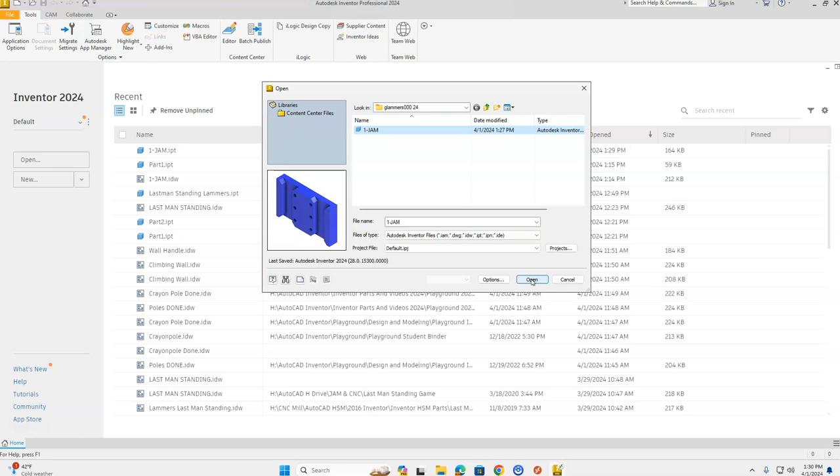Starting with Inventor open, we're going to come up to the orange file in the top left hand corner of the screen, and select Open from the menu. When our Open screen comes up, make sure we're in our H drive, first initial last name 000, and you should see your one jam part there.

Click it to select it, and then select Open. Now, to create our tool paths, we're going to go up above our ribbon bar, where there are different tabs: 3D Model, Sketch, Tools. We want to find the CAM tab right here.

Once we have the CAM tab selected, the first thing we need to do is go to the Job section in our ribbon bar and select Setup. Once this opens up, in our model browser bar on the left hand side, you can see we have three tabs at the top. We're going to take a look at each one, and in each tab we'll go top to bottom.

In this first tab for our setup, we're going to come down to the origin section in our work coordinate system and change stock box point to model origin. You're going to see it take our origin that's in the center here and put it in the bottom left hand corner. So model origin we want selected.

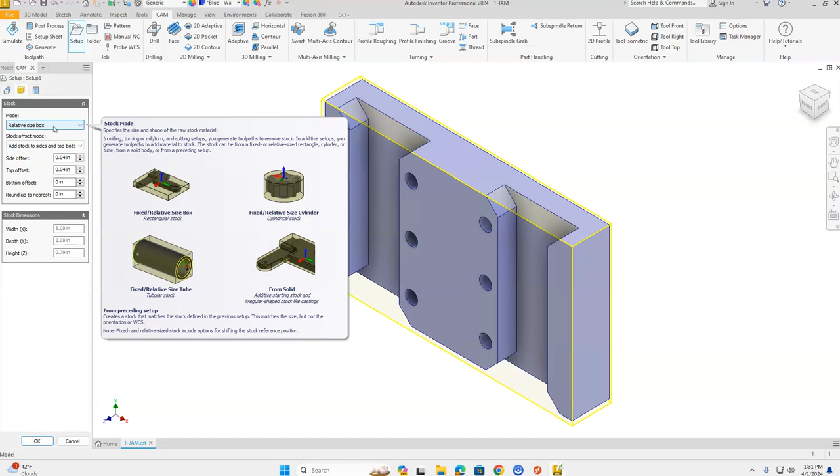Let's go on to our second tab, which is our stock setup. Here we're going to keep it at relative size box, but we're going to change the stock offset mode to no additional stock. You'll see there's a little gap between the edge and our yellow highlighted part, but when we choose no additional stock, it snaps right to the edge of our part.

Let's go on to our third tab, the Post Process tab. We're going to highlight the 1001 that's defaulted in there and change that to one jam. Then click OK.

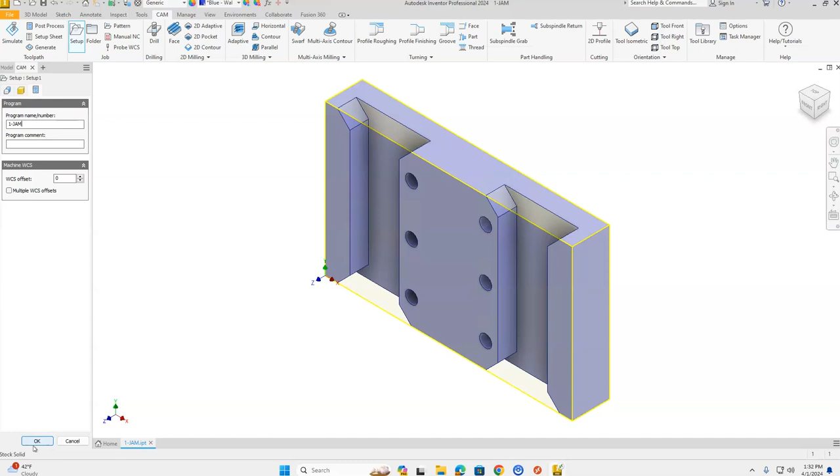Now let's take a look at drilling these holes first. In our ribbon bar, we're going to go to the drill section of our part.

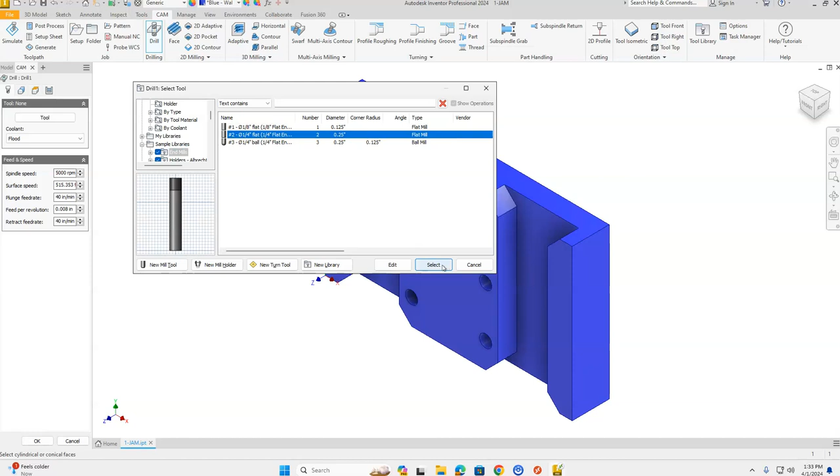In our model browser, again on the left hand side, we have four tabs across the top. We'll go through each one top to bottom. First, in the first tab, we select our tool. Click on the tool button and go to the window on the left hand side, scroll down a bit, and under sample libraries you should find end mills. We're going to choose tool number 2, 1/4 inch flat end mill, and click select. You can see our end mill come in right at our origin.

Let's go to our next tab, where we're going to create and select the holes. I'm going to come over here and select each one of my holes, clicking them in a sequenced order. However, if you take a look here, we also have optimize order as a selection, which means the computer will determine what is the best path to take.

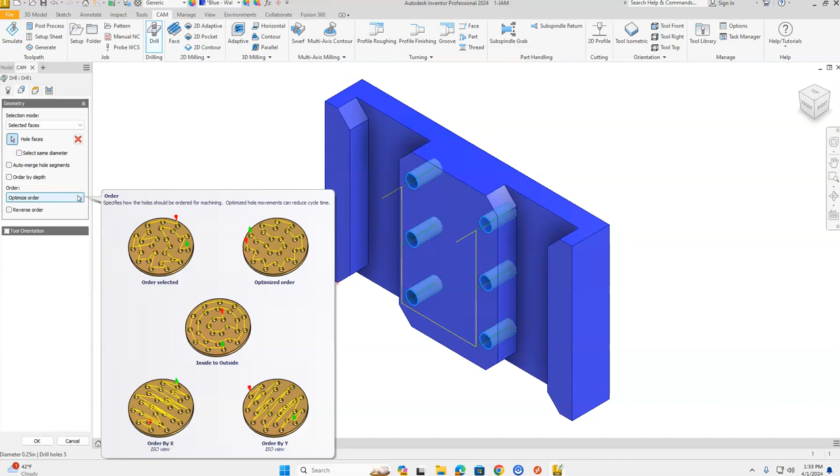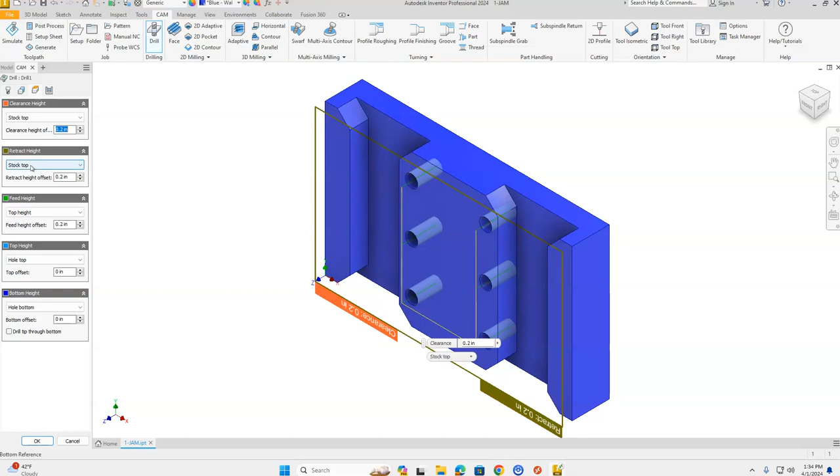Let's go on to our third tab, where we'll establish our heights. Here in our heights tab, the first three items—clearance height, retract height, and feed height—we're going to change each of these to stock top and 0.2. Let's double check: clearance height, stock top 0.2; retract height, stock top 0.2; feed height, stock top 0.2.

Let's go on to our fourth tab. In our cycle section for this tab, we're going to have drilling, and it's going to rapid out, which is exactly what we want. It will drill the hole to the bottom, rapid retract out, then rapid over to the next hole and drill that one, continuing until it has them all. Let's go down to our model browser bar and click OK.

So now we have our stock set up and the holes programmed. Now we're going to do the two pockets here on each side. We're in the 2D section in our ribbon bar, and we're going to come up and choose 2D pocket.

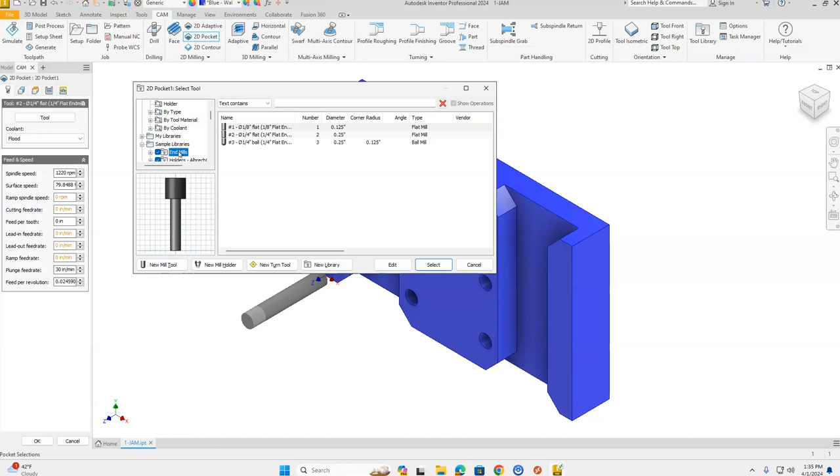For our 2D pocket, we have our tabs at the top. We're going to work from left to right, and each tab we're going to take a look at from top to bottom. The first one, we're going to select our tool. Click on your tool button, go into this little window, scroll down until we find end mills, and select tool number 2, a 1/4 inch flat end mill, and click select.

Next, let's move on to our geometry tab where we select our geometry. Here we want to click the bottom of the pocket for each one of these sections.

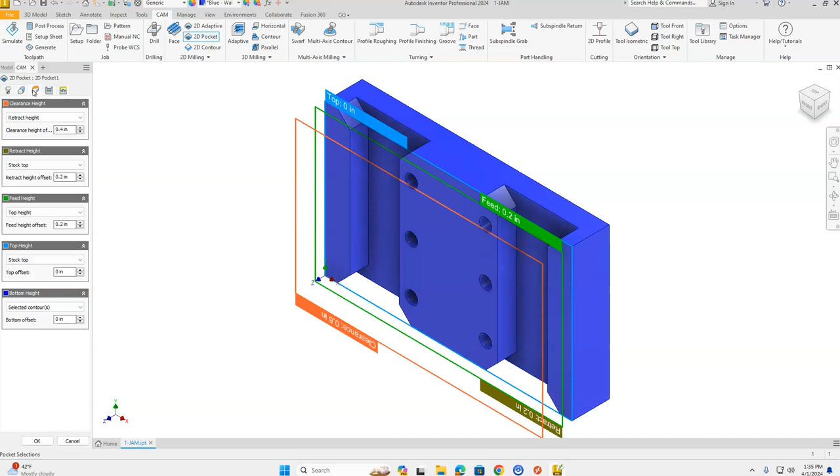Once we have that done, let's go establish our heights in our heights tab. Click on your third tab over. Once again, these are going to be stock top and 0.2, stock top 0.2, and stock top 0.2. The top 3 we're changing - clearance height, retract height, and feed height - are all stock top and 0.2.

Let's go on to our multiple passes. In here, we are going to choose multiple depths. Make sure that section is green check marked. Then we're going to change the maximum roughing step down distance here to 0.25. The next thing we want to do in this section is where it says stock to leave - we're going to uncheck that box. Now we're finished with this tab.

Let's go to our final tab on the right hand side. Here we're going to change our safe distance. You see it highlighted red. We're going to highlight that and change it to 0.2. Next, in our leads and transitions, we're going to uncheck lead in and uncheck lead out. For our ramp style in the ramp section, we're going to change it from helix to plunge.

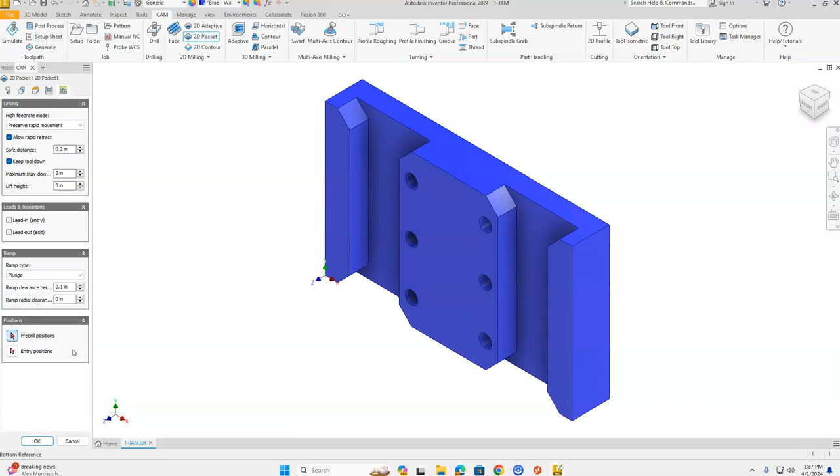Once you have those finished, down in our model browser bar on the left hand side, we're going to click OK, and it should generate those tool paths right there. If you click on that, you can see the tool paths it's going to take. If you click on the drilling section, it's going to show you the drilling operation.

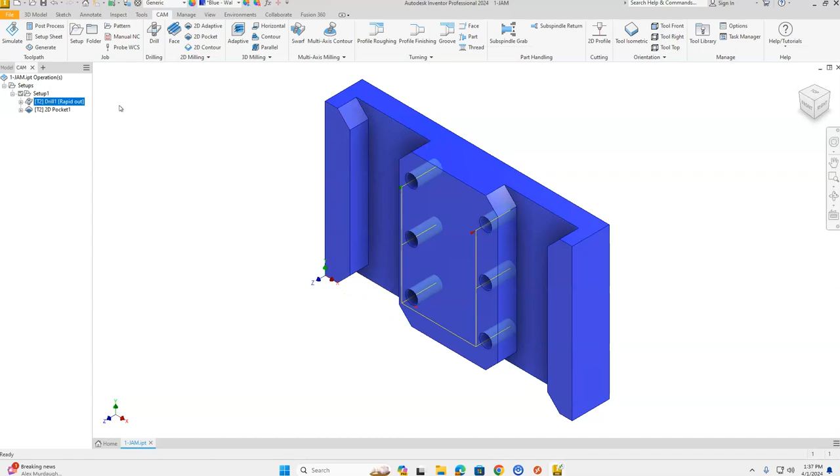Now I want you to click one time on Setup 1. That selects both of them. Then we're going to go up to the top where it says Simulate on the left hand side. We're going to turn our stock on right here, and then click the play button in the middle of the screen. It's going to create your drilling operation first.

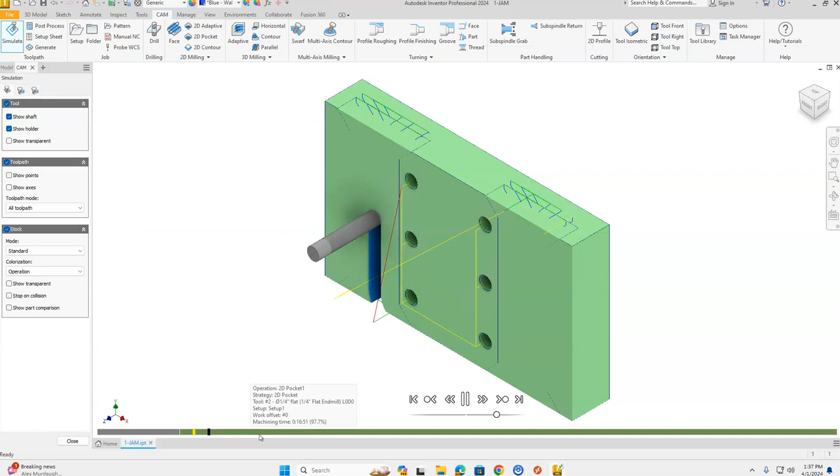Then it's going to go through and cut the 2 pockets that are on the sides. When it finishes, we want to make sure down here in the bottom bar there are no red areas - everything is green all the way through. That shows we don't have any collisions.

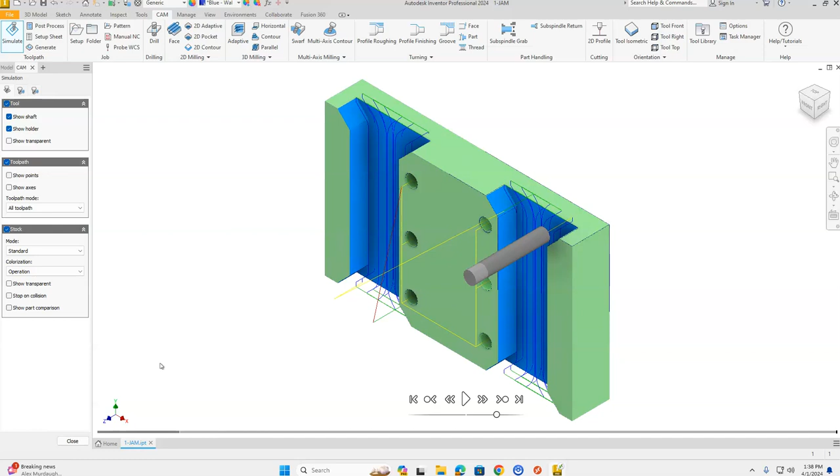Next, we're going to click close in the model browser bar on the left hand side, and we're going to go up here to the top next to simulate and we're going to post process.

When the post process window opens up and loads, what we want to do first is make sure our output folder is going to our H drive. You're going to click this area right here, go to your H drive on the left hand side, and click select folder.

And then our program name should follow through, 1-JAM, and click post. Reference again, 1-JAM, and then click save.

Once it processes it, it takes a little bit of time in order to do that. Your screen is going to change and it's going to show you the HSM editor, and this shows all of our X, Y, and Z coordinates that the tool is going to take to cut, and the M and G codes that are going to control the machine.

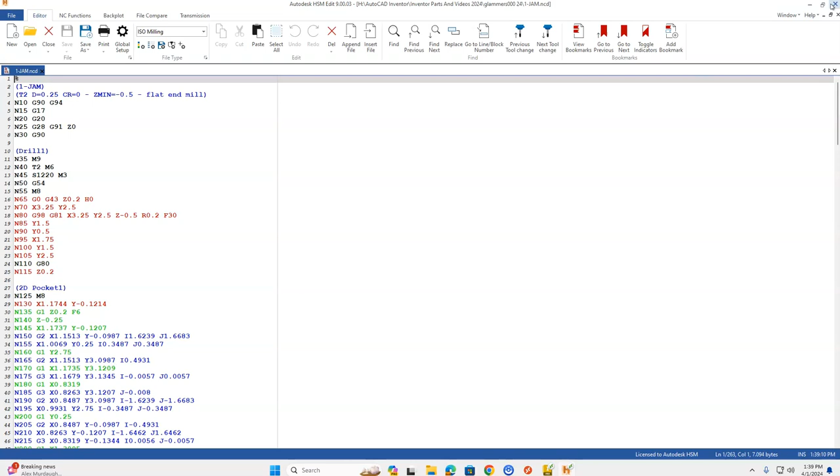We're going to X this window out here. Let's go up to the orange file, go down to save, go update this part, save.

Once you've saved it, you're ready to cut this part. You can log off the computer, go onto the computer that has the CNC mill connected to it, and let your teacher know that you're ready to cut the 1-JAM.

Congratulations on completing the first part in Butler's Precision CAD/CAM.